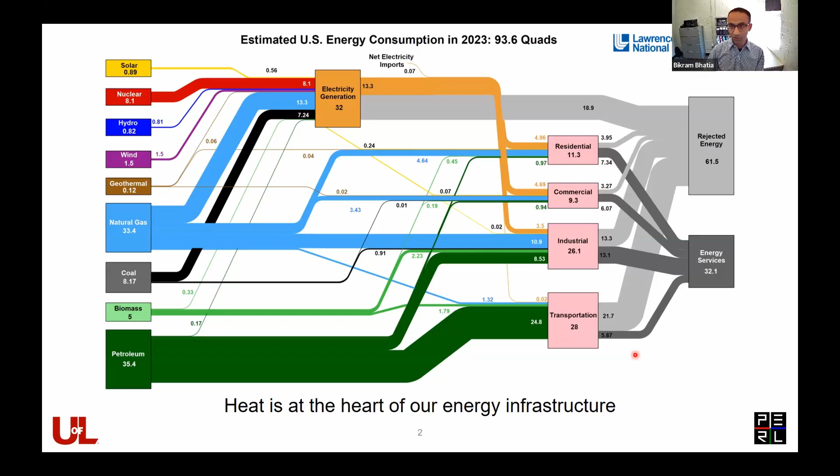So if you look at it broadly, heat is really the backbone of our energy infrastructure. It is utilized in a vast variety of energy systems. It could include heat engines, which involve our power plants, most of which produce electricity, even our internal combustion engines, basically are examples of heat engines. Heat pumps, again used in air conditioning and refrigeration applications in our homes and elsewhere. Heat exchangers, found in applications all the way from your laptop to large industrial applications, and energy storage, thermal energy storage, which is really required moving forward for solving our energy problems in the future.

If you notice, almost all of these energy systems essentially have a fluid as the main heat transfer medium. In the heat engine, you typically have a Rankine cycle, which involves water and water vapor, or you can have a Brayton cycle based on air or supercritical CO2 - again, fluids - which can result in some challenges.

So you have problems with scalability for heat engines, and also the efficiency is somewhat limited, especially for heat pumps that use refrigerants, typically CFCs, which have really high global warming potential. There are also some caps on the efficiencies for heat pumps and heat exchangers, which typically involve two fluids, which can have problems that limit the maximum temperature you can operate them at, and also can have problems with leakage and such.

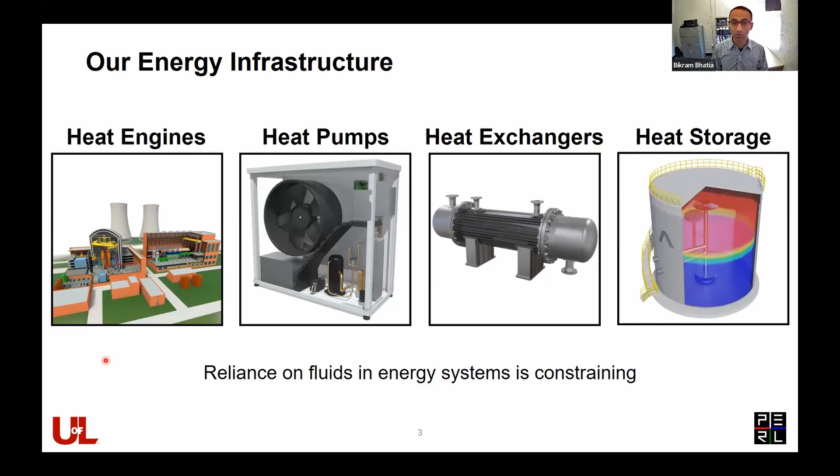Same thing with heat storage. If you typically have a phase change media which goes from solid to liquid, there is a large volume change associated with it, which can cause leakage and other problems like corrosion. So while these fluidic systems have demonstrated to be really effective and relatively efficient, there are some challenges that result from these fluids in these energy systems.

So the question that we've been addressing in our lab is essentially asking: can we replace these fluid-based heat transfer media with something that's solid? The reason why we want to do that is several-fold. In some applications, it can allow you to have a much higher temperature operation, which is directly correlated with higher efficiency. Also, you get rid of a lot of leakage problems, and if you're using solid refrigerants, you don't have to worry about their global warming potential - it's basically zero. It also allows applications that are much more accustomed or well suited for low gravity or zero gravity environments, where especially phase change can cause a lot of problems.

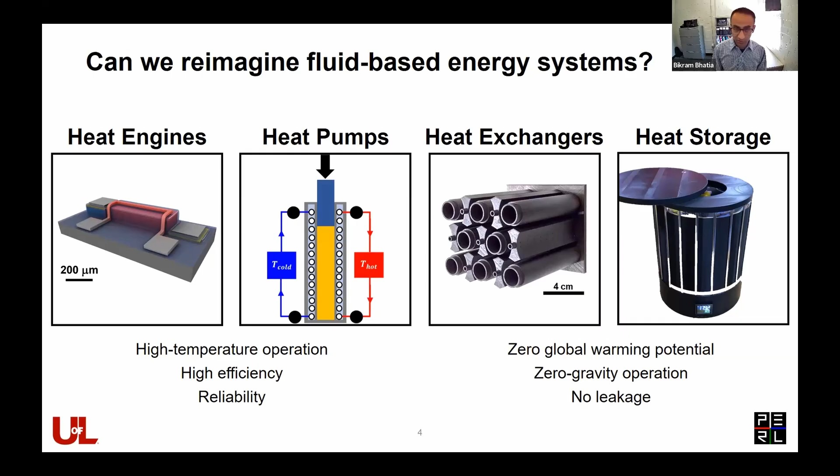So we've been working on a variety of systems in our lab. With the time we have today, I'm going to be focusing on two: one is heat pumps, and the second one is heat exchangers. So let me begin with our work on heat pumps.

So we all are familiar that air conditioning and refrigeration accounts for a significant portion of our total energy demand. Most of it is met by vapor compression systems, which is a very mature technology that typically uses refrigerants that have high global warming potential. So that's a concern, and also its efficiency has sort of stagnated over time.

So people have been looking at a variety of different solid state based heat pumps and refrigeration systems. There has been a lot of work done on magnetocaloric systems over the last 3 or 4 decades, and it's by far the most developed solid state heat pump technology out there, which basically uses a magnetic field and the resulting entropy and temperature change within a solid material to develop a heat pump around it.

Then there is the electrocaloric effect, where you apply an electric field to a solid material, which results in an entropy or temperature change, which you can use for cooling or heating applications. And similarly, there's also elastocaloric, where you apply uniaxial tension or compression to a material, and that results in a temperature change, which again can be utilized in a heat pump cycle.

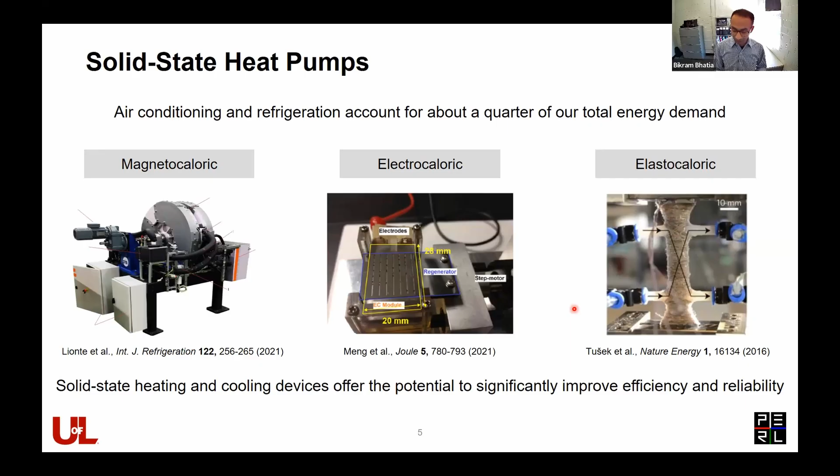What we've been looking at is barocaloric heating and cooling. This is based on the barocaloric effect, which hasn't really received a lot of attention. It only started to gain prominence, I would say, maybe around 2019 or so, when there were some material studies showing impressive performance in some material systems based on the barocaloric effect, which is the entropy change or temperature change of a material when you apply hydrostatic pressure to the material.

And so you can characterize this barocaloric effect by applying hydrostatic pressure. So we do so in our lab using this stress rig that is shown here, which is essentially a piston cylinder system. You fill it up with a barocaloric material. You have a thermocouple embedded in it, and we measure the temperature as we apply pressure.

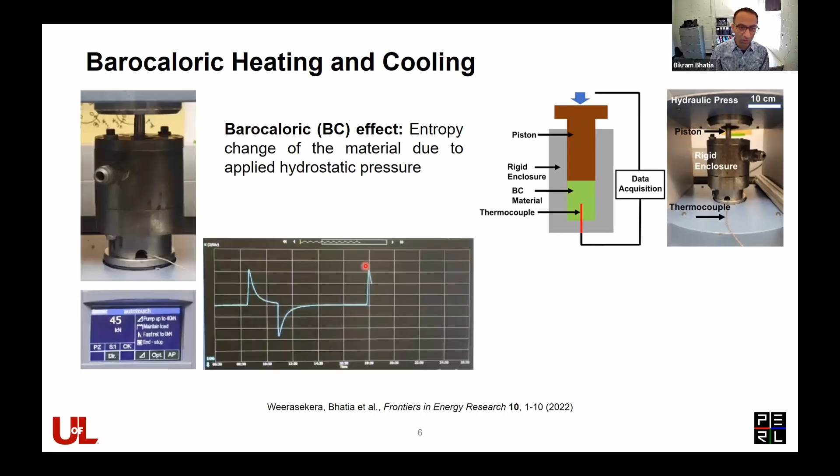And so as you do that, the temperature of the material rises. You let it equilibrate, come to room temperature. And then when you release the pressure, you see that the temperature drops drastically, and then again it sort of equilibrates with the environment. So you can do this material testing for a wide variety of materials.

One representative result is shown here for a material known as Elvax, which is a thermoplastic elastomer. You can see operating around room temperature, you can get to around the lowest temperature of around 0 degrees Celsius. So it's a pretty substantial temperature change of about 27 degrees Celsius or so.

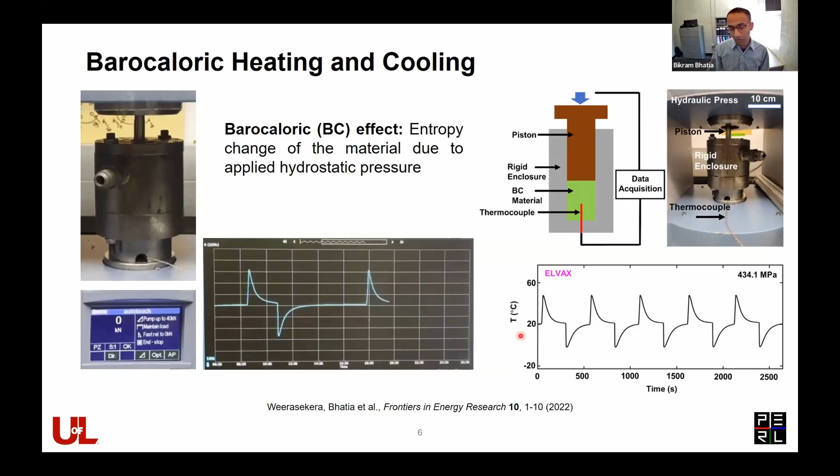So what caused a rise in interest in this field, the field of barocaloric heat pumps and coolers, is the study that came out in 2019, which showed what is known as a colossal barocaloric response in plastic crystals. These are materials that have an order-disorder phase transition, which results in really large latent heats, which are shown here. The entropy changes associated with that order-disorder phase transition can be really large.

It's by far the highest among all the other caloric phenomena tested. And what was interesting was, for the first time, we were getting entropy changes that were on par with traditional refrigerants like R134A. And so that is what caused that excitement. But again, there are a lot of challenges going from this material to an actual device.

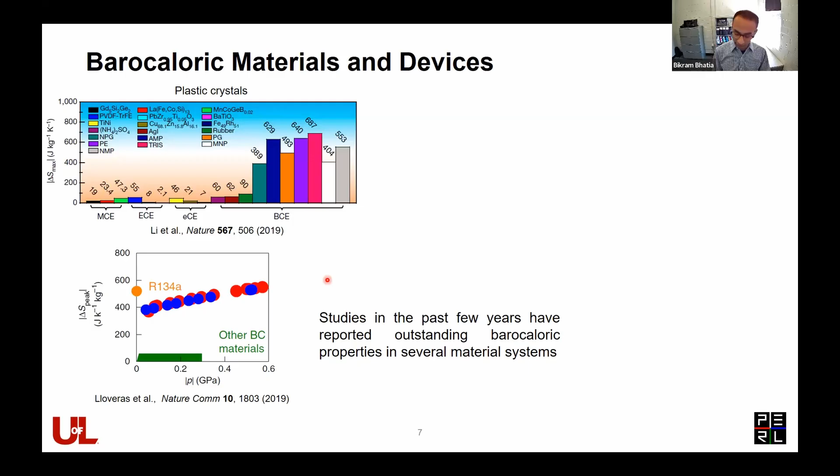There's problems associated with compressibility, also the flowability of the material with high pressures and so on. So there has been a lot of work on these materials with this solid-solid phase transition, but we've mostly been focused on looking at elastomeric materials, which do not have a phase transition, but basically have an entropy change associated with the entangling and disentangling of these long polymer chains in these elastomers.

And specifically what we studied were thermoplastic elastomers, which sort of balance the trade-off between high entropy changes and temperature changes with the high thermal conductivity of the material, which is also something that you care about if you're building a device out of it.

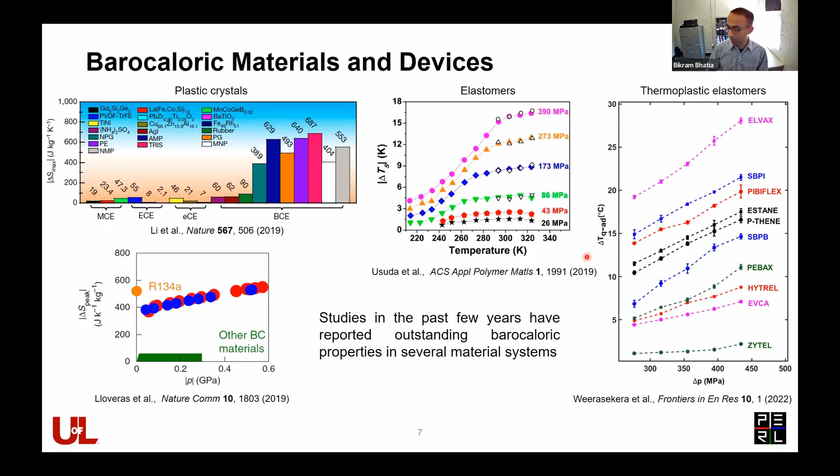So most of the work in this field has been primarily focused on the material side of things, the solid state refrigerant, and rightly so. But there has been almost no work looking at the translation of these materials into an actual working device prototype. So that's something that we've been focused on.

And we basically took this idea of the barocaloric material and combined it with a prototypical heat pump, which works on a reverse Brayton cycle. So you basically have a four-step cycle where you compress the barocaloric material, which results in an increase in temperature of the barocaloric material.

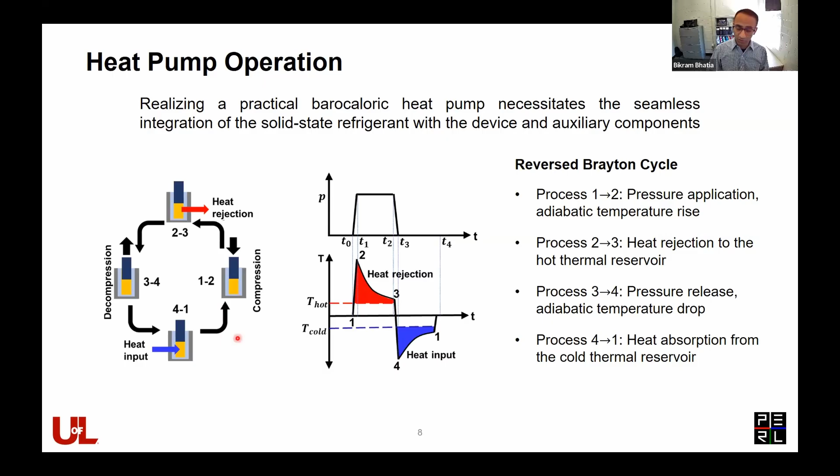You interface it with the hot side, and you reject the heat, and then you release the pressure, which results in a sudden drop in temperature, and then you interface it with the cold side heat exchanger or cold side reservoir, completing the cycle. So you can go through this cycle several times and basically have a functional heat pump.

So we characterize the performance of this heat pump, like most, using two key metrics. The first one we look at is the specific heating power. And in our case, we are mostly focused on the heating side. You can also operate it in reverse and really focus on the cold side and make it work as a refrigerator. But we, in our work, mostly look at the heat pump operation.

So we define the specific heating power as the amount of heat that is transferred to the hot thermal reservoir over the cycle time of this reverse Brayton cycle, normalized by the mass of the refrigerant that we're using.

And of course, we also look at the COP, which basically is the efficiency of the heat pump, which is again defined as a heat transfer to the thermal reservoir divided by the work input, which in this case is mechanical work, so pressure.

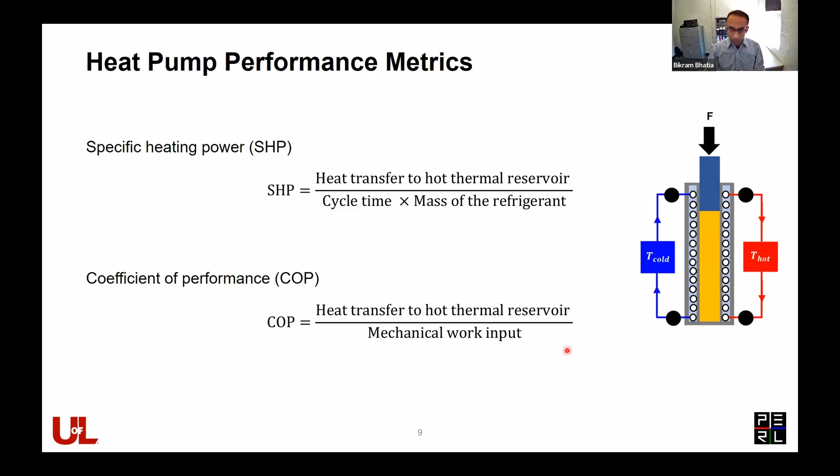So we first started off with modeling this device performance. We have three components. First is modeling the amount of work that we put in into the refrigerant.

So this is mechanical work going into the compression of the material. We can use linear elastic theory, and we compare the normalized volumetric change of the material as a function of applied pressure. And from there, we can figure out how much work we put in. That goes in the denominator of the COP equation.

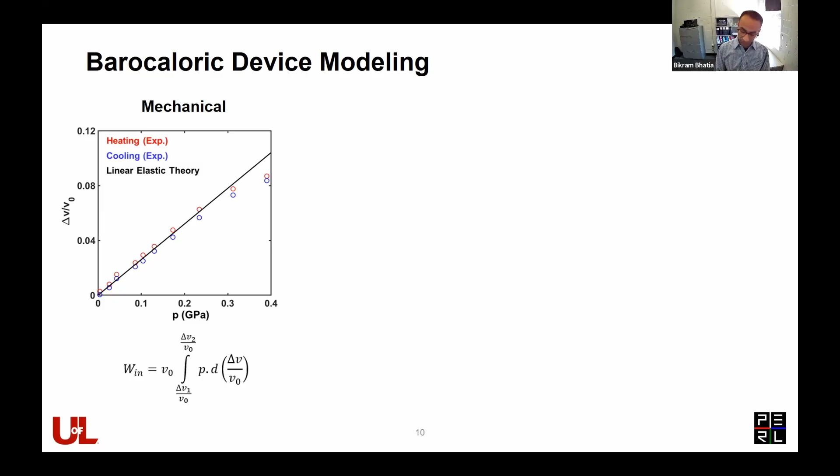Then we have the barocaloric response of the material. So how much does the temperature change of the material with applied pressure? Again, for this, we mostly use some phenomenological work that is reported in the literature, and also experimental data reported in the literature for elastomers, which do not have a phase transition.

And we model the thermal transport, basically as heat goes into the refrigerant and out from the refrigerant, using basic heat conduction and convection equations. So we have this finite difference model, which can basically numerically model the operation of the heat pump.

So we can predict what the temperature cycles will look like for the refrigerant, and also for different hot and cold thermal reservoirs, and also predict how much heat is being delivered in each cycle at every time step. So using this, we can figure out what the specific heating power and COP of the heat pump is as a function of applied pressure, which is shown here.

So we picked a material known as nitrile butadiene rubber, which is a common elastomer, widely available, low cost, as our material of choice, which already had experimental results reported in the literature.

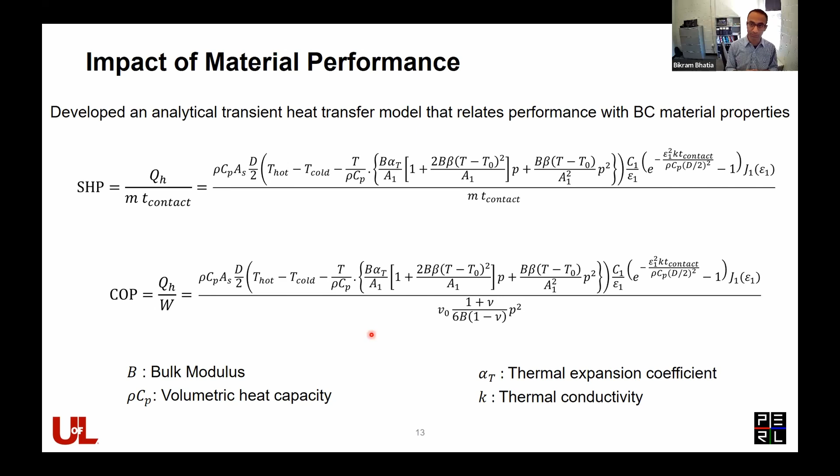So all of these are included in this set of equations that allow us to predict what the specific heating power and the COP of a device will be for different material systems. So we use this model to look at what the effect of different material properties would be on the device level specific heating power and COP.

One representative result I show here is the specific heating power for nitrile butadiene rubber as a function of thermal conductivity. As you'd expect, as thermal conductivity increases, the specific heating power as well as the COP increase, while all other properties are held constant for this imaginary device.

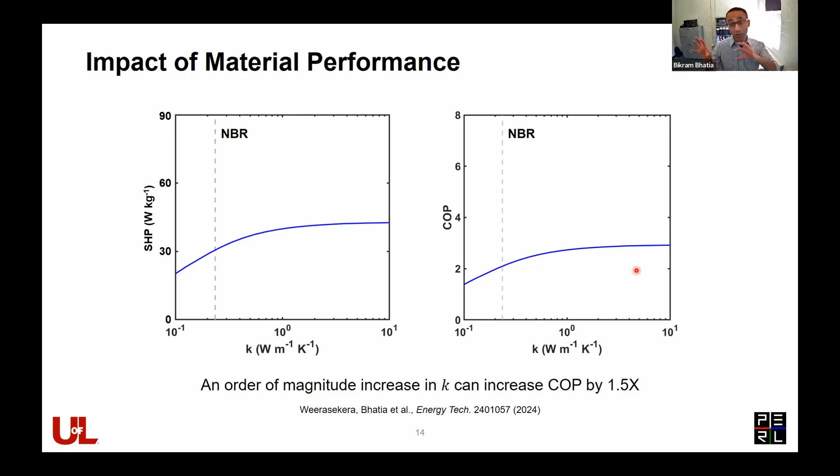So we have this model that we can now use to correlate all the material properties to actual device performance. The next step was to build the device, which is what we focused on, which hasn't been done except for one work that did not report the experimental performance for some reason. But we wanted to do that. And the reason we think this hasn't been done so far is primarily two reasons.

One is we are applying really large pressures for these barocaloric devices, on the order of about 400 to 500 megapascals. That's 2 orders of magnitude higher than what you typically have in a vapor compression system. So designing something that can withstand that high pressure is critical and not trivial. The second problem is essentially extracting heat from the barocaloric core and back into it, which is tough because, again, these are low thermal conductivity materials.

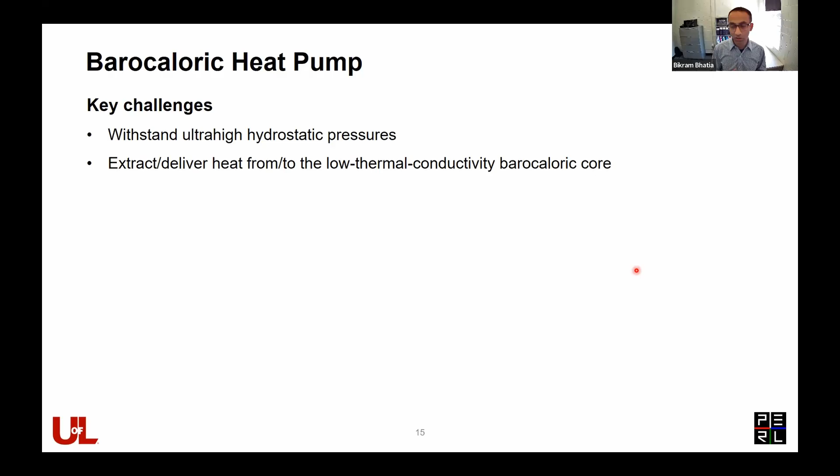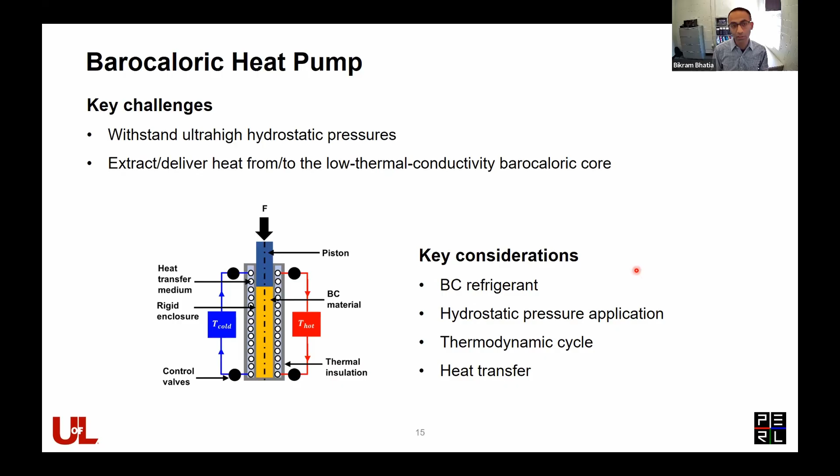So that is somewhat challenging. Those are the two key challenges we focused on, and we went with a simple piston cylinder idea using an elastomer as our barocaloric material, which we chose as nitrile butadiene rubber, with a Poisson's ratio of around 0.5. So when we apply hydrostatic pressure on the piston, the pressure gets equilibrated within the solid media fairly uniformly, and so we focused on the core first.

So we did that using a helical heat exchanger that surrounded this barocaloric core. We modeled the transient heat transfer from the barocaloric core when we apply pressure, and how that pressure gets transmitted to the heat transfer medium around it, which in our case was ethylene glycol. We looked at how the temperature evolves over time as a function of different numbers of passes of the helical heat exchanger.

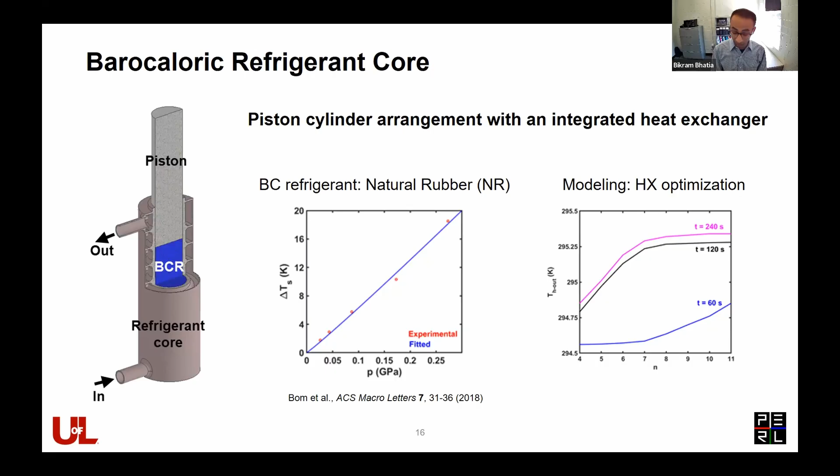Based on these results, we said around 8 coils, 8 passes is good enough, because we don't want to have a lot of thermal mass of the heat transfer media around the barocaloric core, as that slows down the performance and reduces the heating power. So we settled on around 8 passes for the helical heat exchanger.

And then we went ahead and built it. Again, the key challenge is you need to withstand high pressure. So we decided that titanium 6-4 alloy, which is well known to have really high strength and also relatively decent thermal conductivity, was our material of choice, which we used to fabricate this barocaloric core using laser powder bed fusion.

The fabricated part is shown here, and the core along with our manifolds are shown here. So we really focused on the wall thickness of this heat exchanger.

Because we don't want the Ti-64 wall thickness to be too large, as that impedes heat transfer, but also we didn't want it to be too thin, because then it won't be able to withstand the pressure. So we calculated the hoop stress and determined that around 2 millimeter thick wall is good enough, with a certain factor of safety, for our experiments to design this heat exchanger.

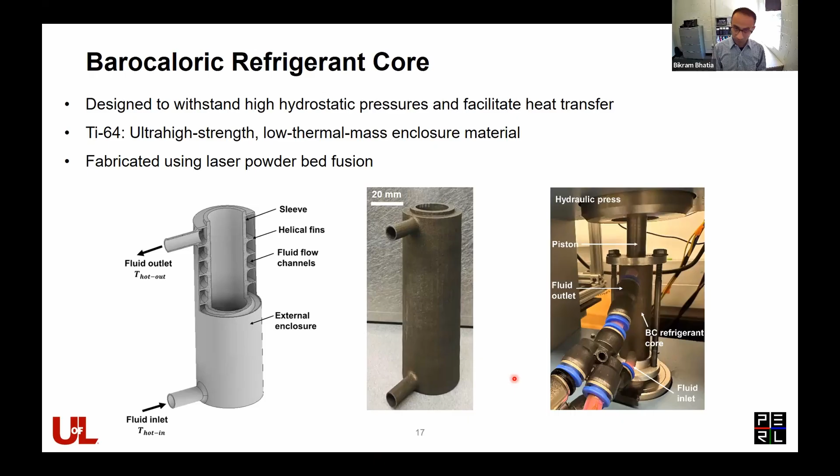And barocaloric. So this is the actual assembly that we have for the barocaloric heat pump in our lab. It basically comprises two constant temperature thermal reservoirs for testing. We have...

Solenoid valves and peristaltic pumps that basically pump ethylene glycol at high and low temperatures through the barocaloric core. We also have thermocouples at the entrance and exit of the barocaloric core to measure the inlet and outlet temperatures. Everything is controlled by a DAQ, so we can time the cycles pretty well.

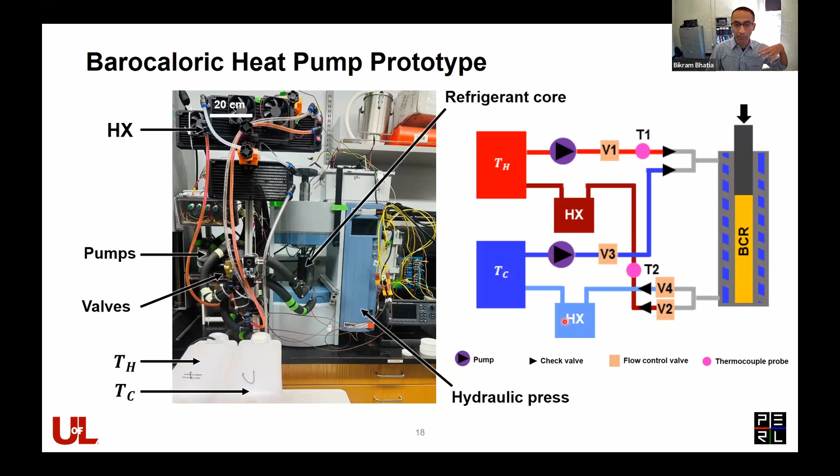We also have heat exchangers to mimic the heat load, heat being released to the hot side and heat being absorbed from the cold side. So the way this heat pump prototype works is you first compress the barocaloric material while all the valves are closed, with no heat transfer media flowing through the core.

You apply pressure, the temperature rises. You open the valves and allow the temperature of the heat transfer media to rise as it passes through the barocaloric core, and that heat is rejected through this heat exchanger and is returned to the hot thermal reservoir.

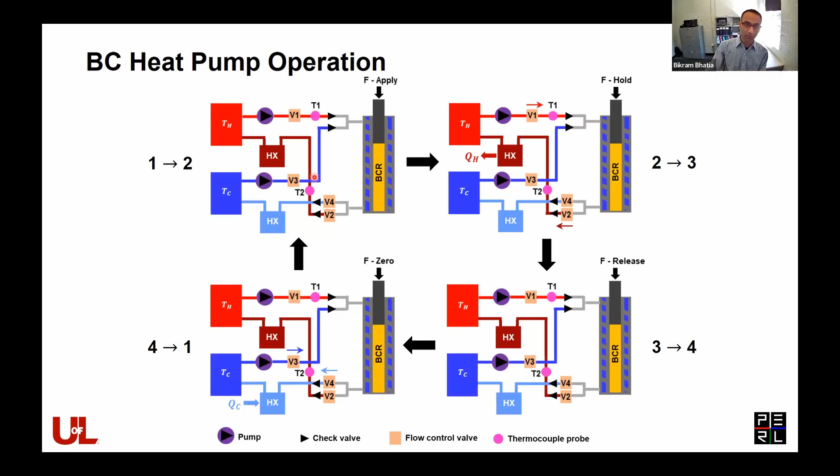We then close the valves and release the pressure, which causes the temperature of the barocaloric medium to drop. We open these other valves from and to the cold thermal reservoir and allow heat exchange to the cold side thermal reservoir, basically releasing the pressure and repeating the cycle again.

You can see that as you apply pressure, you increase the temperature of the core, and you have a heat exchange step with the hot thermal reservoir from 2 to 3. From 3 to 4, you release the pressure, causing a drop in temperature of the core, and finally you allow heat exchange with the cold thermal reservoir.

For the purpose of this experiment, we kept the temperatures of the thermal reservoirs fixed, and we could change it within a certain range. Depending on the adiabatic temperature change of the refrigerant material, we had a span of around 6 to 7 Kelvin, which is sort of actually you can see.

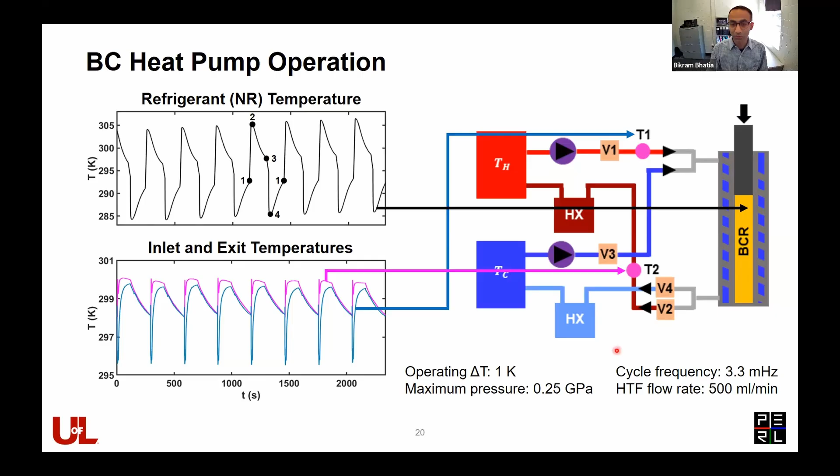So we did experiments as a function of delta T. The results shown here are for a delta T of 1 Kelvin, 250 megapascal applied pressure, a cycle frequency of 3.3 millihertz, and a heat transfer flow rate of 500 milliliters per minute.

From this experimental time series data, we can extract what the specific heating power is. As I showed before, as you apply more and more pressure, you increase the specific heating power, which is what we see for all these experimental results.

And when you look at the COP, you see that as you apply higher and higher pressures, the COP actually decreases, and that's again because we are in the regime where the denominator of the COP equation sort of dominates, where the amount of work you put in is dominant.

As you go to higher and higher pressures, even though the entropy change within the material increases, the work input term also substantially increases. So you have a decrease in the COP as you go to higher and higher pressure.

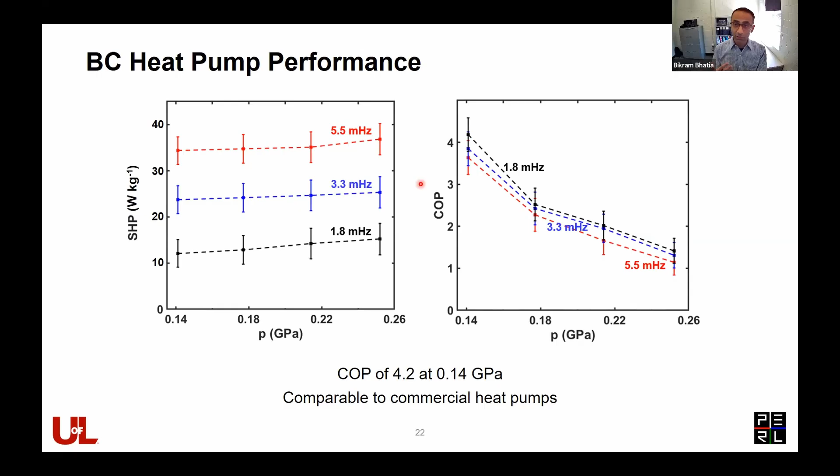But at this lowest pressure setting that we tested, we actually measured a COP of around 4.2 with this commercially available material, which if you compare with commercial heat pumps, the typical COP is around 3 to 4. So even with this first prototype, we were able to report COPs that are competitive with commercial heat pumps.

And we are really excited because this is just a first prototype. There's obviously a lot of device optimization that could improve the performance, and we are working on some of that. We also believe that if we use some of these recently demonstrated refrigerants that have a solid-solid phase transition, we can achieve COPs based on our modeling upwards of 15, based on existing demonstrated barocaloric materials.

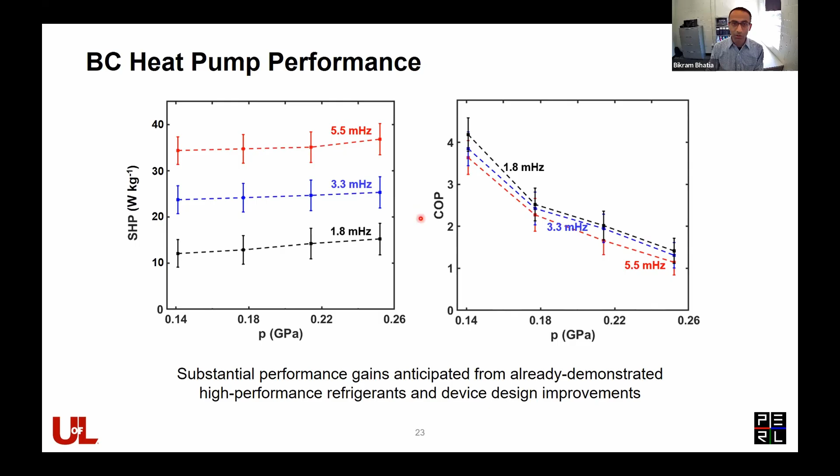So that's the work on the barocaloric heat pumps. I will next move to our other work, which focuses on heat exchangers.

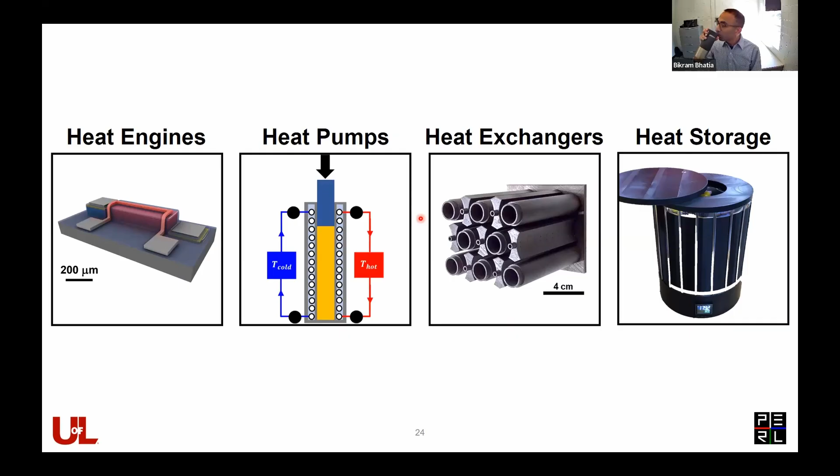Our work on heat exchangers focuses on heat exchangers for concentrated solar power application. CSP, if you're not familiar, is basically a way of generating power using the sun's heat. It primarily constitutes a field of mirrors known as heliostats that focus sunlight onto a receiver, which has a heat transfer media. This heat transfer media could be solid, liquid, or gas.

The US Department of Energy has looked at all three media over several decades now, including running pilot scale facilities. They've determined that there are several challenges with fluid-based media.

If they looked at air as a heat transfer media, that was work done by Brayton Energy up in New Hampshire, I think. There was also a lot of work done, which concluded that air has a relatively low thermal conductivity, so it wasn't as competitive.

And then there is also a lot of work with molten salts, which change phase from solid to liquid. But again, they have challenges associated with leakage and corrosion, some of the things that I mentioned earlier.

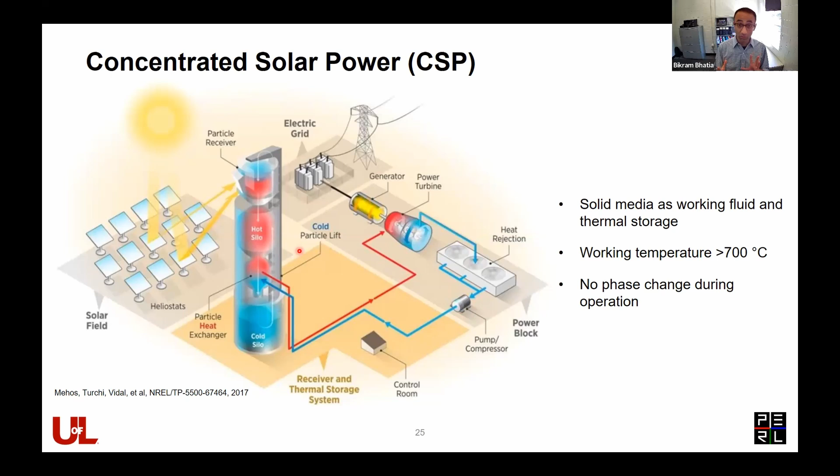You have a secondary fluid, typically supercritical CO2, which drives a power turbine based on the Brayton cycle, ideally at high temperatures to produce power. One of the key bottlenecks for this power tower configuration for CSP is the heat exchange from hot solid particles into the secondary media, which is most likely supercritical CO2 for the Gen 3 CSP systems. That's a part we really focused on.

There are different kinds of heat exchangers that people have looked at. I'll focus on two key ones that are most common and studied widely in the field: one based on tube banks for falling particles or gravity-driven flow, and fluidized bed-based heat exchangers. Each one has its own advantages and disadvantages.

For a tube bank heat exchanger, it's really easy to implement. It is perfectly compatible for a power tower kind of application. You can have a scalable heat exchanger based on your application. The problem though is that the heat transfer coefficient from that solid particle into the tube wall is not very high, so the overall heat transfer coefficients are low.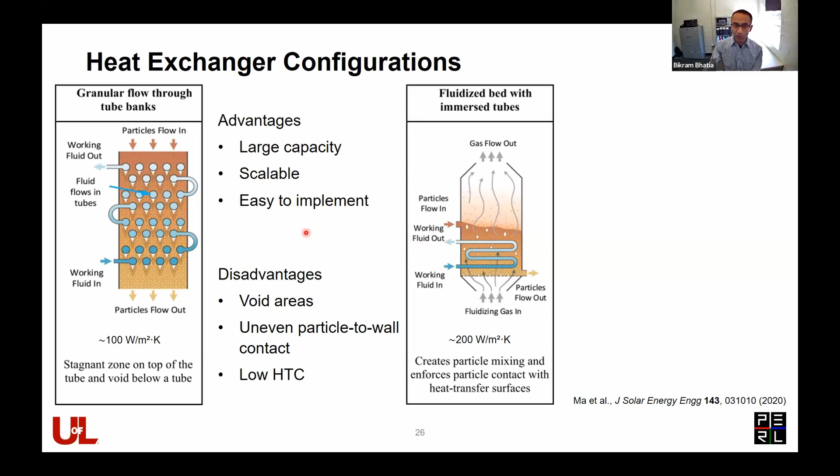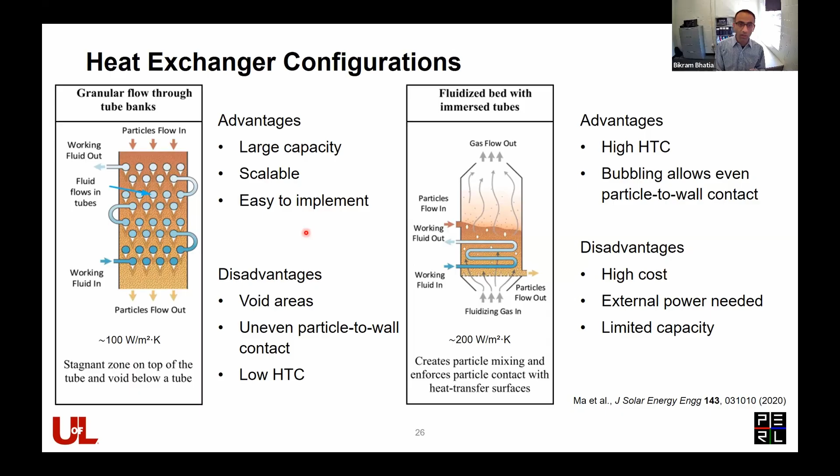On the other side, you have the fluidized bed heat exchangers. It can give you a much higher heat transfer coefficient, but the problem is that it is complicated to integrate with the CSP system and can have a lot of parasitic losses associated with it. So those are the pros and cons of each. We've looked at both. I'll start off with the work we did on tube banks.

If you look at sand falling on a typical circular tube, which is a common configuration for our tube bank heat exchangers, you'll notice that particles actually accumulate on the top. They are sort of stagnant and they form a void at the bottom, which is not great for heat transfer. That is one of the main reasons why the heat transfer coefficient from these hot sand particles to the wall is not very high.

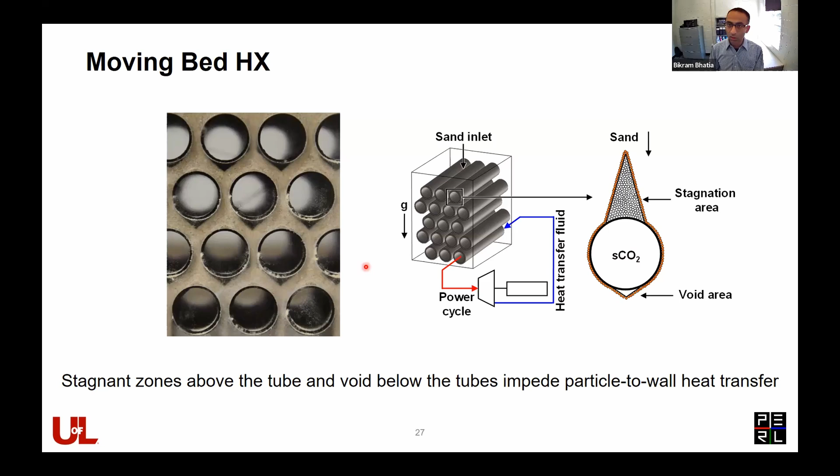We used these test coupons to study this gravity-driven flow over these tube bank heat exchangers. We did high-speed imaging of these falling sand particles around these tubes, and based on that, we can track different particles and figure out what is the velocity around the tube for different kinds of heat exchanger configurations.

We looked at different tube geometries, including circular tubes, which are most common in the industry. We also looked at these diamond shapes and hexagons, which have been reported in the literature before. It was claimed their performance can be better than the circular tubes. And these airfoil shape structures that we came up with were inspired by airfoil wings in aircraft.

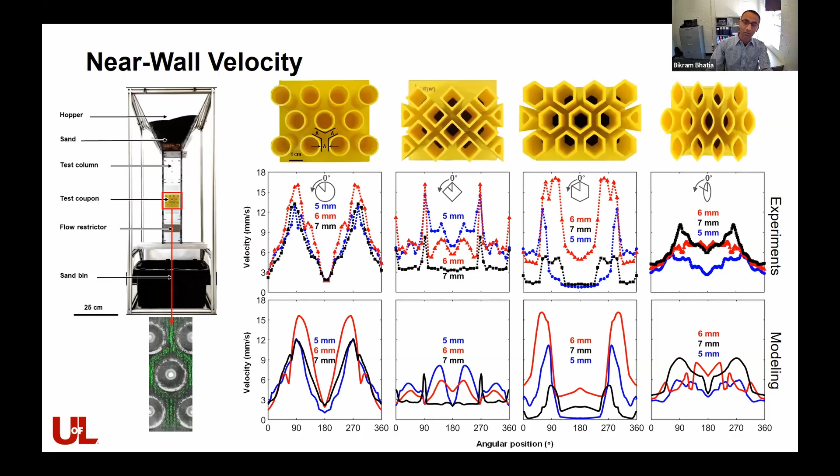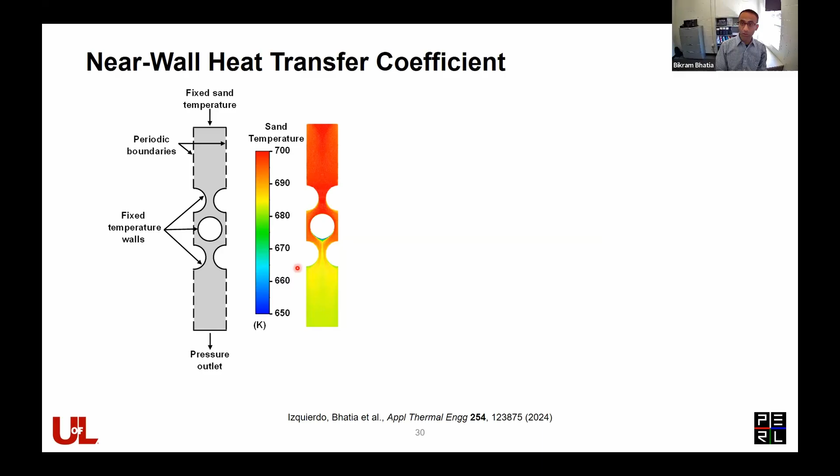It promotes really a collisional flow, where the particles move sort of much more uniformly around the coupon, whereas all these other geometries had streaming flow, where you had sort of blockages in some parts, and free flow in other regions of these coupons. So that is what we think explains the higher heat transfer coefficient of the airfoil relative to these other geometries.

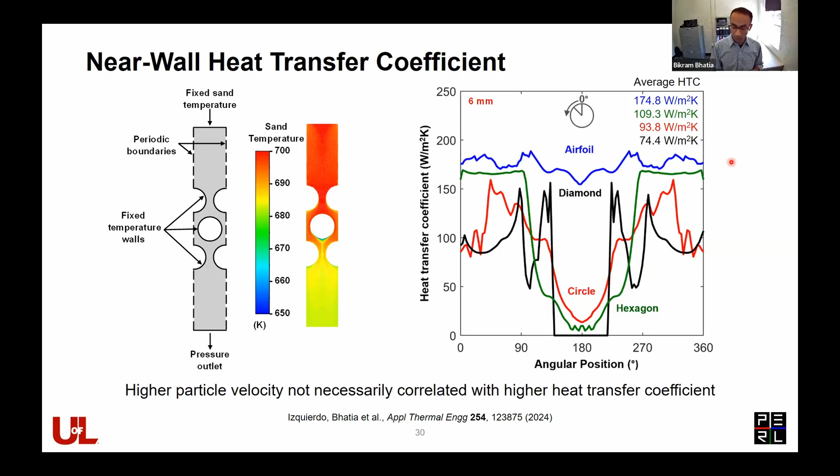And so this was great, but still the tube bank heat exchanger is not ideal in terms of heat transfer coefficient, as I mentioned. So the other configuration that we could look at was the fluidized bed heat exchangers, which people have looked at, including a lot of people in industry.

The challenge here is, again, twofold. One is that integrating a fluidized bed heat exchanger in a CSP power tower configuration is not quite straightforward. And the second, more interesting from our viewpoint, is really characterizing the heat transfer from a fluidized bed heat exchanger system, where the flow is really stochastic and difficult to predict. So that is something we were interested to study.

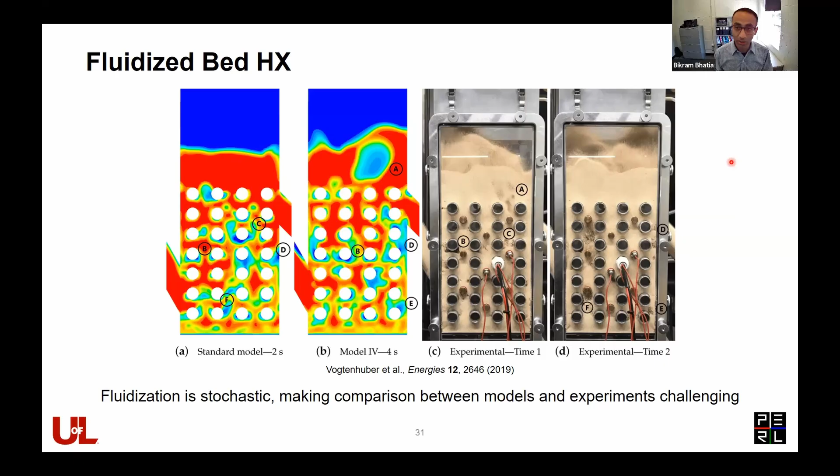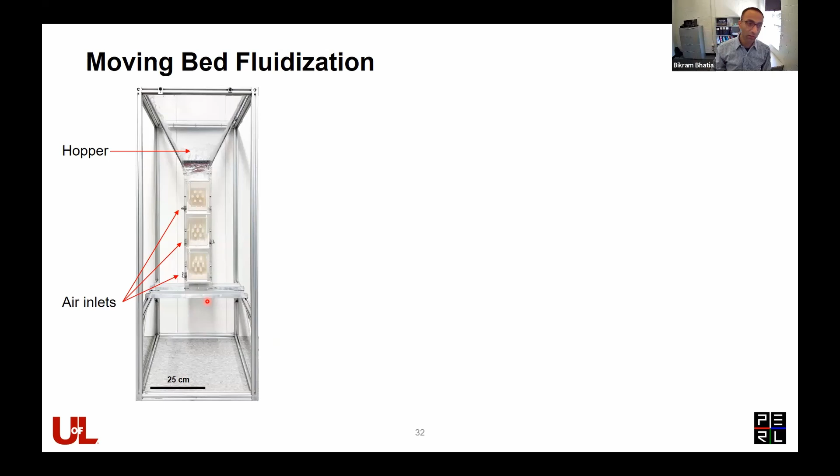So the first thing that we did was create this multi-stage moving bed fluidization heat exchanger system, where we built a setup with 3 stages, where the sand came in and then was fluidized through these air inlets at each of these stages.

And we looked at the particle flow around these tube walls as it went through different stages. Also, we have these air inlets on the bottom, and note that they have a sort of a cap on the top, which is quite typical in fluidized systems, to prevent the sand from blocking these air inlets, which almost causes the sand to flow in a clockwise direction. So they have this interesting directionality associated with it.

So like before, we did high-speed imaging and focused only on the near wall region, basically around 10 particle radii around the tube wall. And we calculated what is known as a granular velocity. This is essentially the velocity of the particles in this near wall region as a function of the angular location of the particle. And we evaluated what the density of these sand particles are in that particular region in our experiment.

So it is obviously a function of time, which is sort of what you see in the video playing on the left, as a function of angular location. It fluctuates quite a lot, and so that was sort of our challenge: to understand how this correlates with the heat transfer to the tube wall. And to understand that, it's really hard to develop a heat transfer coefficient measurement experimentally, a local heat transfer coefficient measurement, for these granular systems.

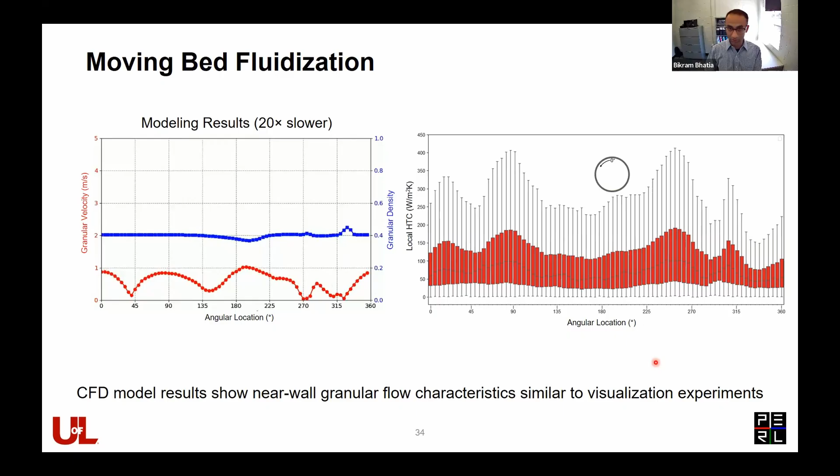So we use this model, including the energy equation, to predict what the local heat transfer coefficient is - that's heat transfer from the hot sand to the tube wall as a function of angular location. We average it over time, and that's what you're seeing here. The horizontal narrow bars represent the mean, the red bars represent one standard deviation, and the total range of measurements from this model are represented by these large vertical bars.

So what we really wanted was the heat transfer coefficient from our experiment, and we argued that okay, the model is not high fidelity enough, but it does capture the basic physics of the particle flow for the two-phase fluid flow around the tube wall. So what we did was input tube geometry and other parameters like air velocities, as well as the granular velocity and granular density that we got from the momentum transport part of the model, by solving the momentum transport equation. As the output, we gave the heat transfer coefficient.

And so we had several million data points from this quick simulation that we could do. We trained a random forest model that essentially gave us a function allowing us to map experimentally measured parameters, such as the granular density and velocity that we had from our high-speed experiments, and asked it to predict the heat transfer coefficient, which it did, shown in this plot here. And it looks pretty interesting.

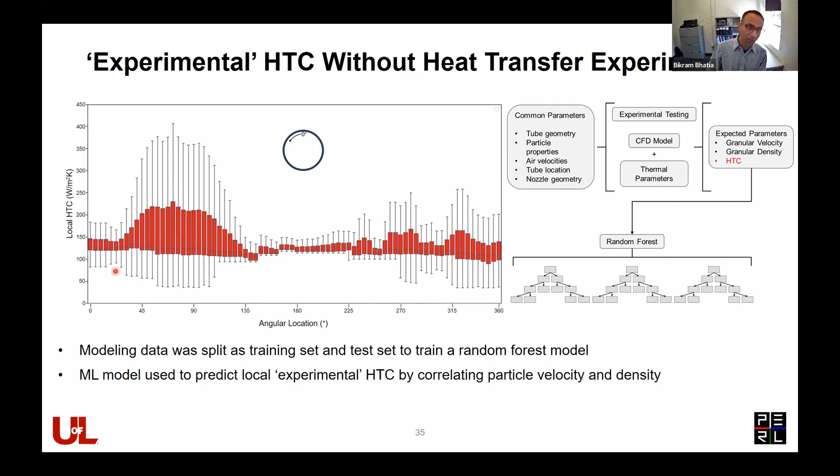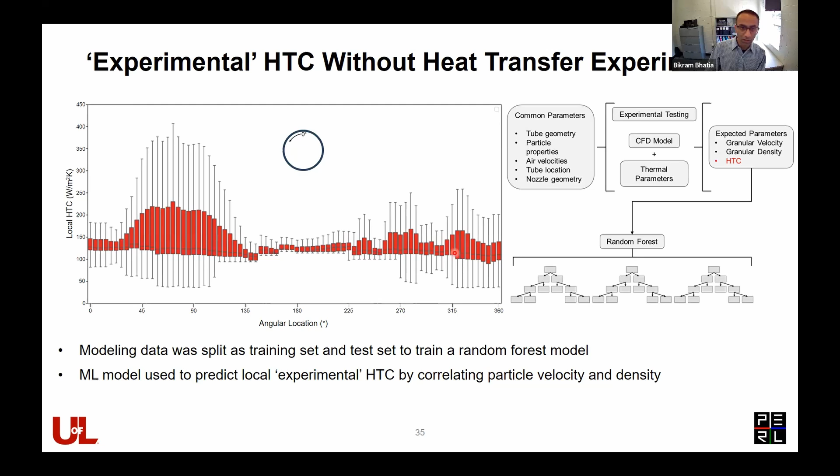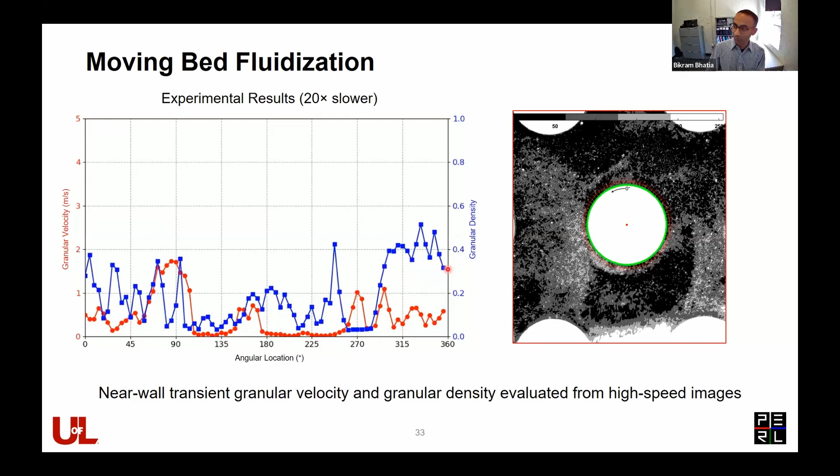You see first that there's some asymmetry, and the magnitude conforms with what you'd expect for a fluidized bed heat exchanger, and it's in accordance with the DDPM high fidelity model we ran for the same experimental configuration. But you see this asymmetry, which wasn't really there in our training data, that we see in the experimental result - which we were actually quite happy to see, because in our experiment, as I mentioned earlier, we do have this asymmetry.

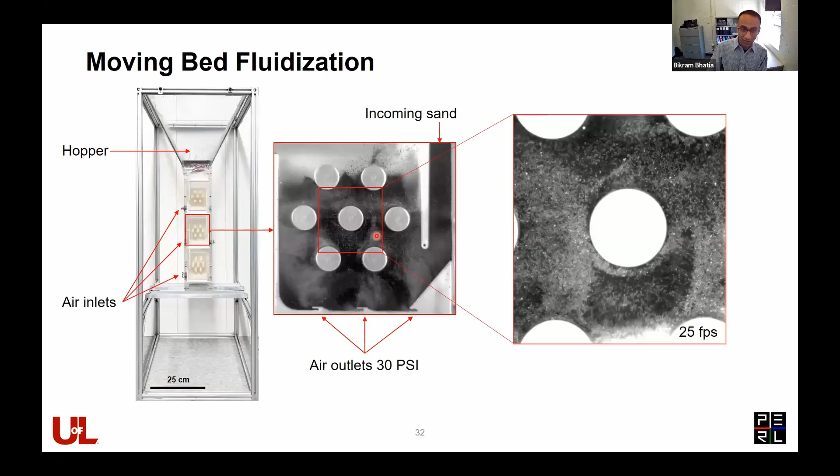In our experimental setup, the air actually forces the sand to flow in a clockwise direction, so you have slightly higher velocity on the left side versus the right, which is what we see in our heat transfer coefficient data. We really see four regimes, even in fluidized bed systems, for this heat transfer coefficient: the top regime, which despite the fluidization still has a narrow stagnant zone; then this high velocity, high mixing area on the vertical edges; on the bottom, periodic stagnation and large voids; and also some high velocity mixing on the other vertical wall, giving relatively high velocity and heat transfer coefficient, but not as much as on the left hand side.

So that sort of excited us, and we're working towards looking at more configurations and mimicking different hierarchical structures for different kinds of heat exchangers based on this approach.

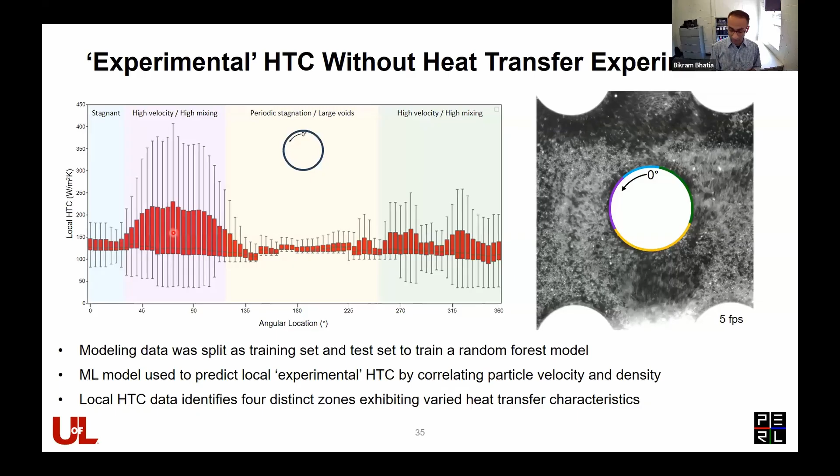So with that, I'm here at the end of my talk. Just to summarize, our group is really focused on working on energy systems that try to replace fluidic-based heat transfer media in different energy systems and replace them with solids. The work I showed you today focused on a heat pump that uses the barocaloric effect in solid media for heat pumping, and I also showed work on solid particle-based heat exchangers, typically for CSP applications. But again, all this work can have applications in a wide variety of areas, including HVAC and refrigeration, energy generation, as well as thermal energy storage.

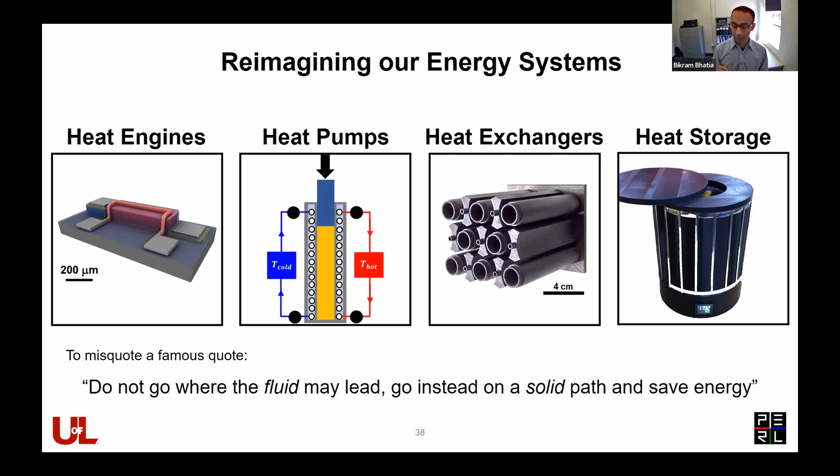If you go back to the model I showed, there are essentially three parts to think about: a force, a barocaloric response, and a thermal transport. So if you have a stack interdigitated with some high thermal conductivity media, that definitely helps the thermal transport. You have to ensure the pressure gets transmitted uniformly, which is a challenge in some solid media because the Poisson's ratio is not 0.5, so they're not always very incompressible, and the pressure doesn't get transmitted. If you are able to transmit the pressure uniformly, the barocaloric response will be similar. And if your system configuration improves thermal transport, that's definitely a plus, because that's one of the biggest bottlenecks for device performance of a heat pump. So yes, if you look at different device architectures, there are ways to improve overall performance. Hopefully that addresses your question.

Yeah, thank you. Thank you. Okay, I see Akanksha has her hand raised, so please go ahead.

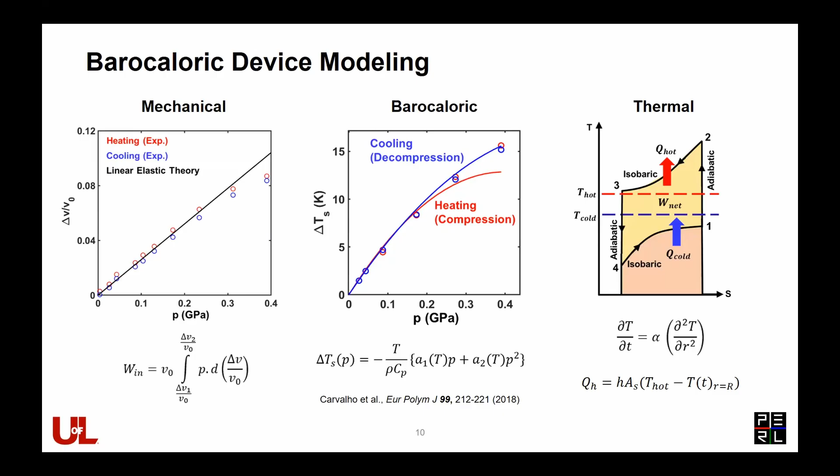Thank you, Bikram, for the nice presentation. I had a couple of questions. For the model you developed, you said you used the one-term approximation for the transient model. That's valid within a certain range of Fourier numbers. Did you check what that corresponds to in terms of your cycle times, and is that still realistic from the application standpoint?

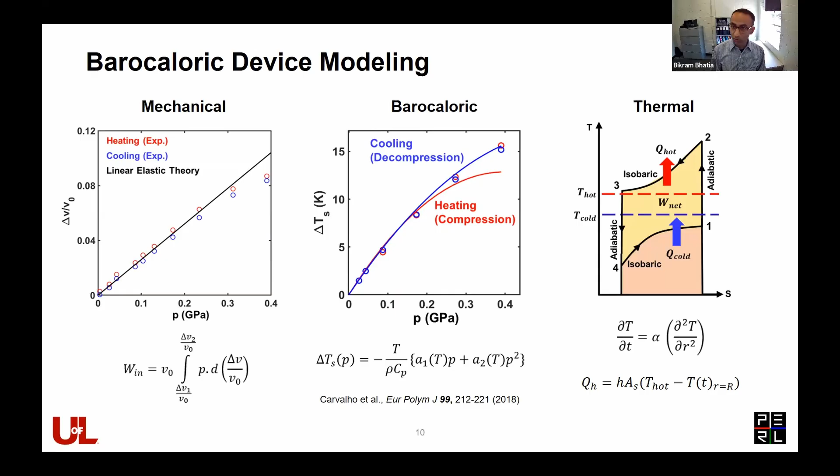Yes, that's a wonderful question. My student and I spent about 6 months answering that question. We did look into it, and it definitely narrows down our frequency range of operation. We cannot operate at higher frequencies. But if you look at the frequencies we're currently operating at, which is in the 1 to hundreds of millihertz range, I think the one-term approximation, if I remember correctly, limited us to maybe 50 millihertz or so, not all the way up to 100 millihertz, but pretty close. At the same time, it gives us a ballpark of the performance in a relatively easy manner, since we just have an equation to get that closed form solution.

Another question I had: I don't know much about barocaloric materials, but do they experience any kind of hysteresis if you run hundreds of cycles with these materials?

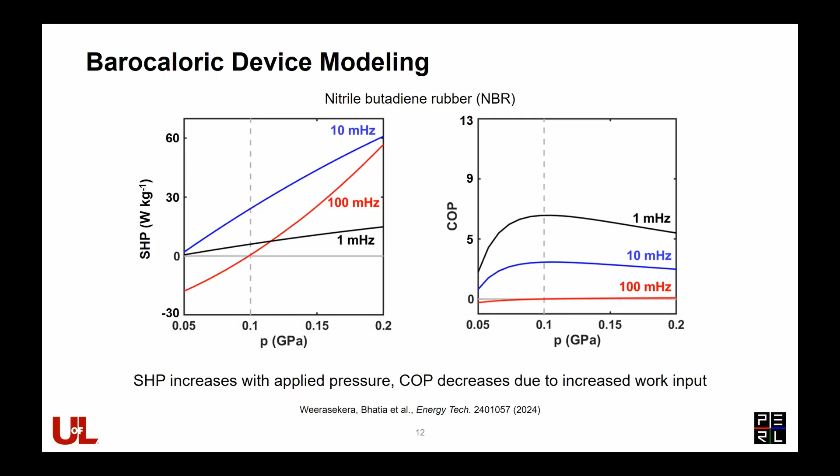Yes, that's another very good question. There is a lot of work that material scientists are doing on hysteresis. This hysteresis is particularly a problem for materials that have an order-disorder phase transition, which are the materials we're most interested in. That was another reason we did not choose, at least as a first step, materials with solid-solid phase transitions, because the hysteresis is substantial, on the order of about 10 Kelvin when your delta spans 30 Kelvin or so. So it's pretty substantial. In elastomers, the hysteresis is relatively low. The fatigue life is decent, although it hasn't been tested specifically for barocaloric applications, just for elastomers in a wide variety of other applications. The performance is decent and the hysteresis is relatively low compared to materials with a disorder transition. That said, a lot of chemists and material scientists are working on reducing this hysteresis. They think it has to do with hydrogen bonds being broken and reformed as you apply pressure. So there are reports of lower hysteresis materials being published almost every other week these days.